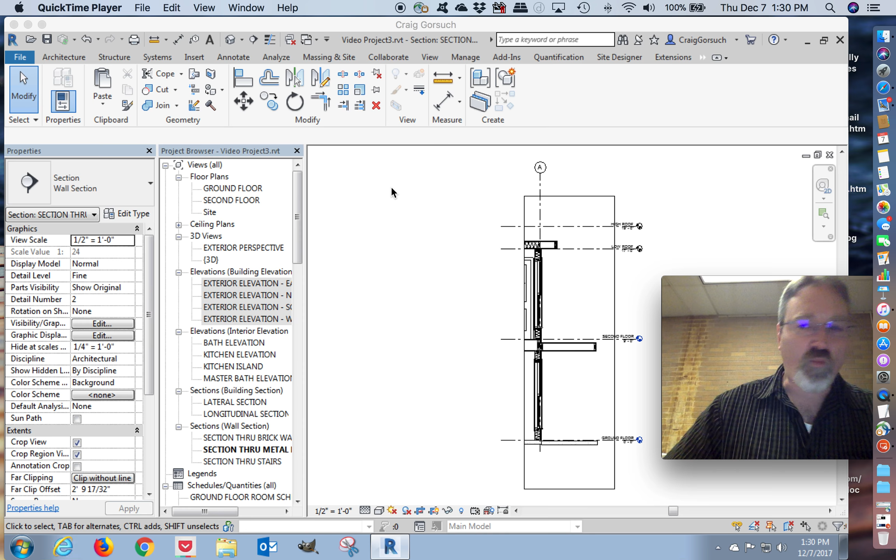Sorry guys, you're catching me mid-chew. I'm still sort of wrapping up lunch in between classes. Alrighty. Yeah, I know. Horrible manners abound. I know, I get that.

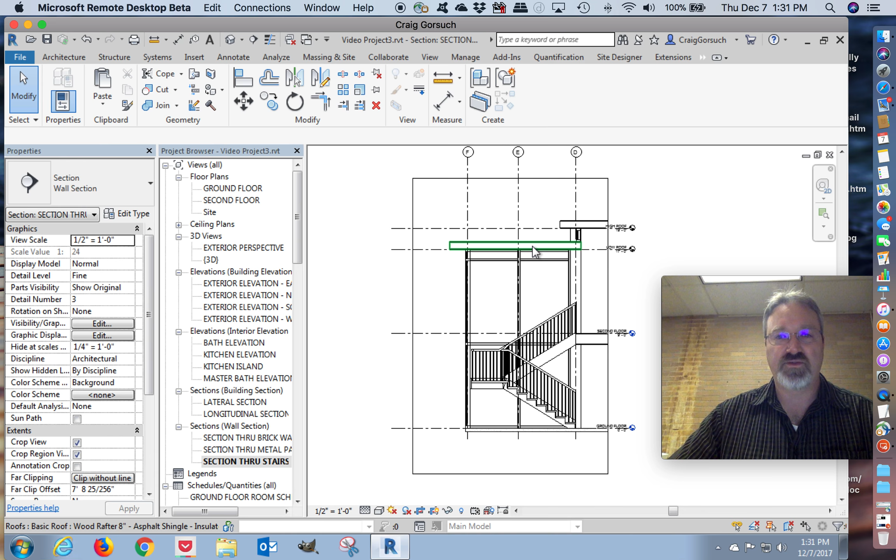Okay. We just finished dealing with some issues on our metal panel exterior wall. Let's go take a look at our stairs. Now, the things that we need to do to our stairs are not quite as extensive. For example, there's not a whole lot of information that we can add to the storefront. We are going to modify the placement of those mullions, and they have to be done kind of in a special way. But we need to add some information right through here, and we need to add a little piece right here. So let's zoom in.

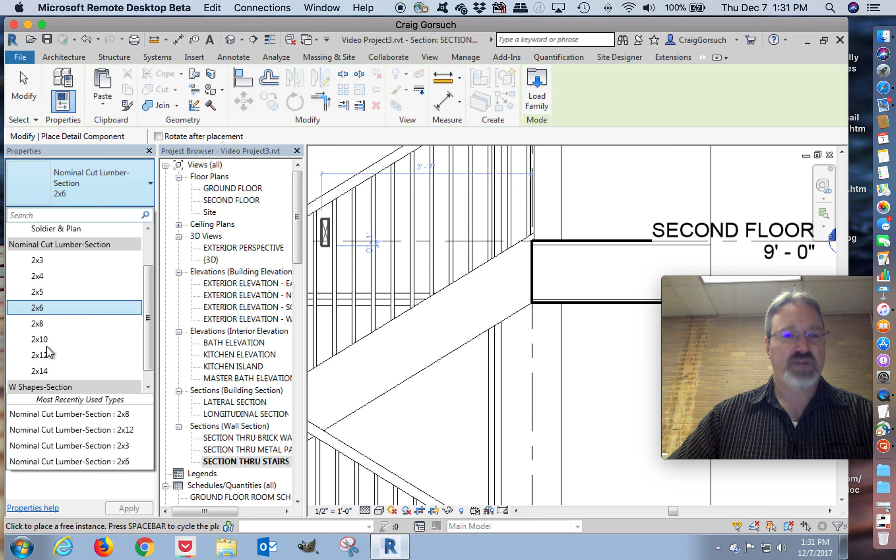Second floor, this is in front of the landing for the staircase. Back to, excuse me, annotate, component. Why, yes, thank you. I'd love to save the project in case something explodes. I don't want a 2x6, I want a 2x12 because that's the size of the member that happens right there. I'm going to go ahead and spin this. No, I don't want to spin that around 180 degrees because I want this to line up on the outside right there.

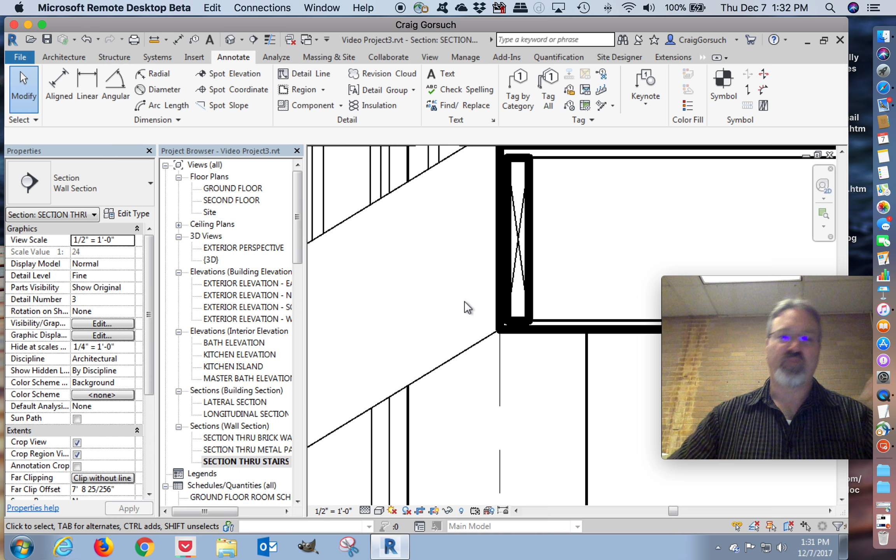And we're going to fake in having a chipboard wrap that runs up the side of that. I'm going to select that bit of framing, use my move command, and move that over a 1/2 inch because that's the same thickness as a typical bit of sheetrock. It's kind of hard to see. It is there. It's going to indicate that something's going on. And we're not discussing actually creating details in this class. That's something else. Okay. I'm going to zoom up here.

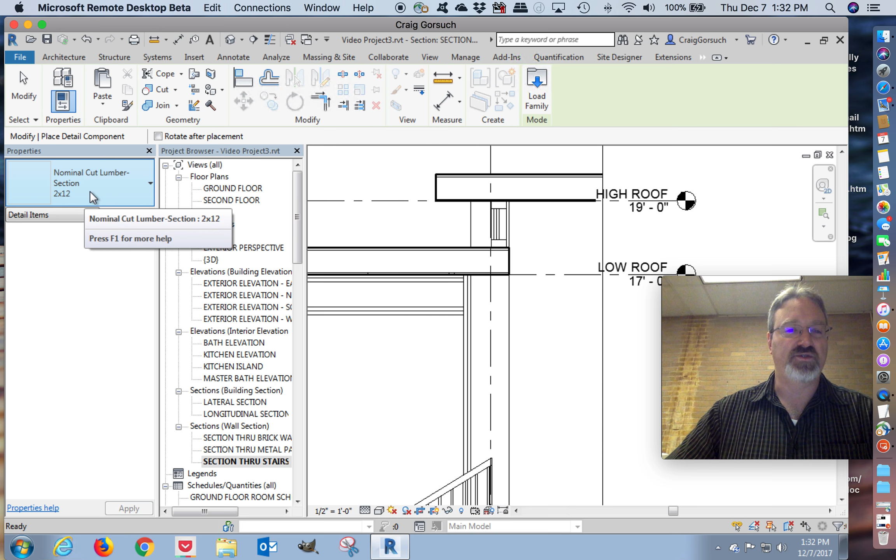We've got some issues on the high roof and issues on the low roof. We need to fill in the missing elements here. So again, I'm going to place a component, but instead of a 2x12, I'm going to use a 2x8. I'm going to zoom in. Where does he go? He's going to go, okay. I am going to spin him around and put one there. I want to put another one right next to it if it will let me. There we go. Boom, just like that.

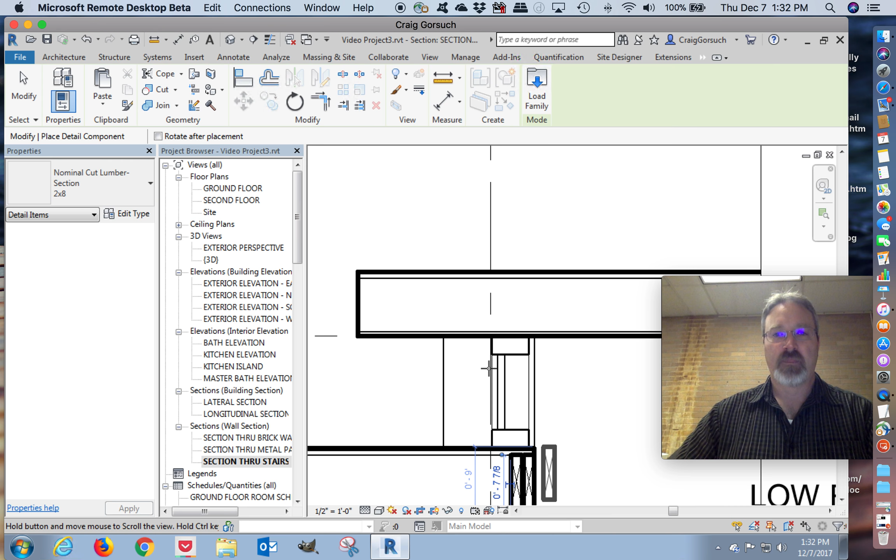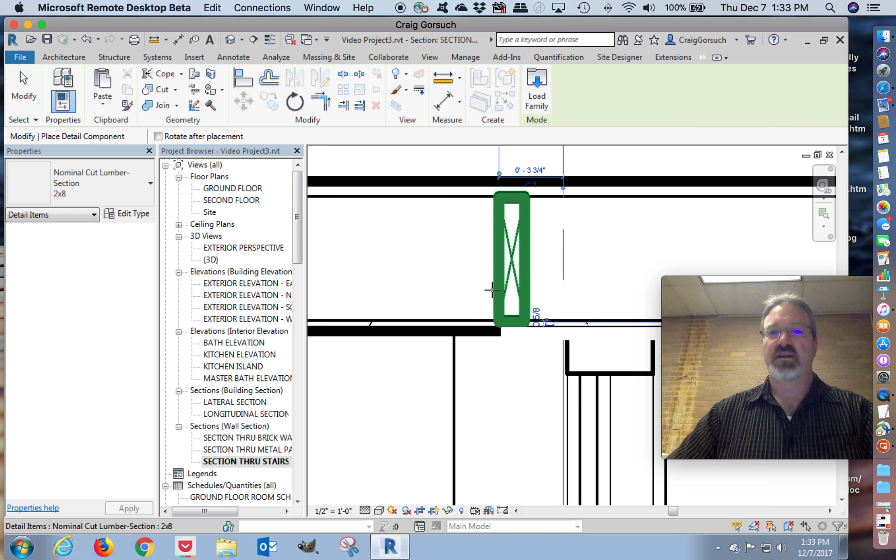Press the space bar twice so I can spin them around, so I can place one here. And I'm going to fine tune the placement of this one. Let me check my notes real quick. There we go. Sorry about that, guys. Again, I'll fine tune the placement. Let's rotate 90 degrees. Change our size to a 2x5. I'm sorry, a 2x6. Excuse me. 2x5s really don't get used very often. Rotate them.

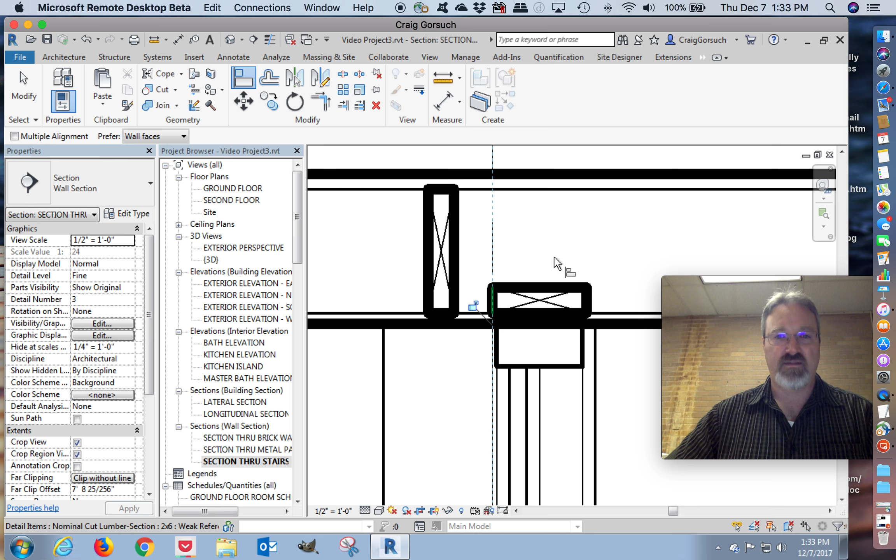There we go. I want the front end of that to align with the grid line here. Actually, it looks like it's there. I'll use my align tool to double check. Modify, align. I want to align to my grid line, and I want to make sure the back edge of that framing is in alignment with it. So that's what's happening there. That's exactly what I want it to look like. Press escape a couple times.

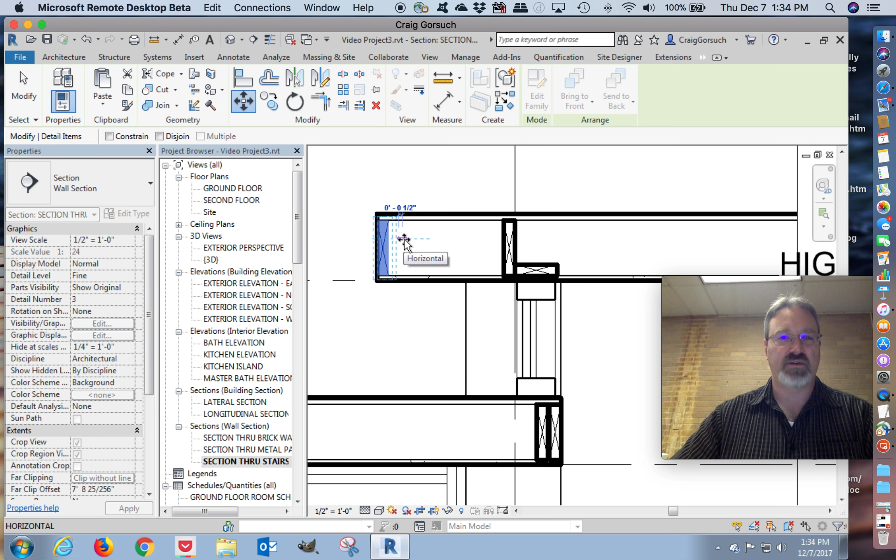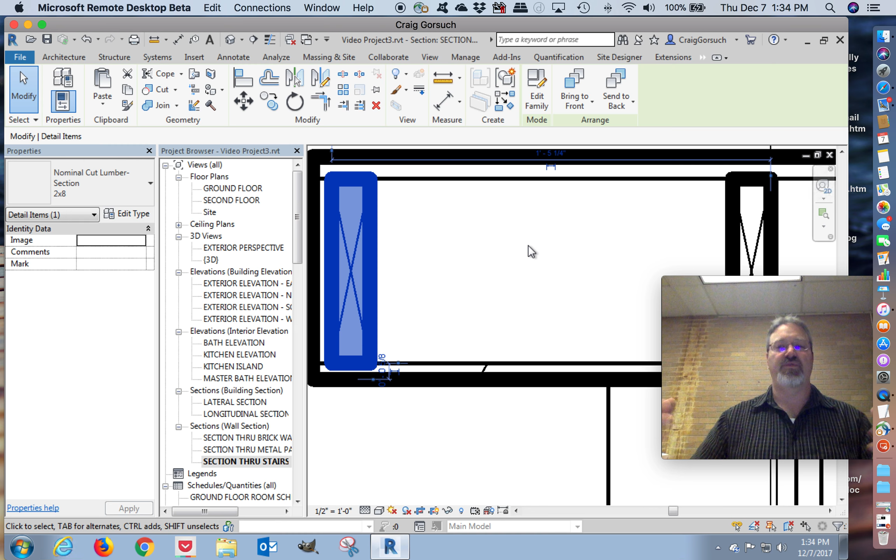Okay. Select this end piece of lumber. Use my move tool. Move that back 3/4 of an inch. And you can see I can use those temporary dimensions to fine tune what I'm doing. It's easier when you zoom in, when you can actually see what those dimensions say. Or of course, just like in AutoCAD, you just drag in the direction that you want to go and then type in 3/4 of an inch and it will go that direction. So the math is already built in.

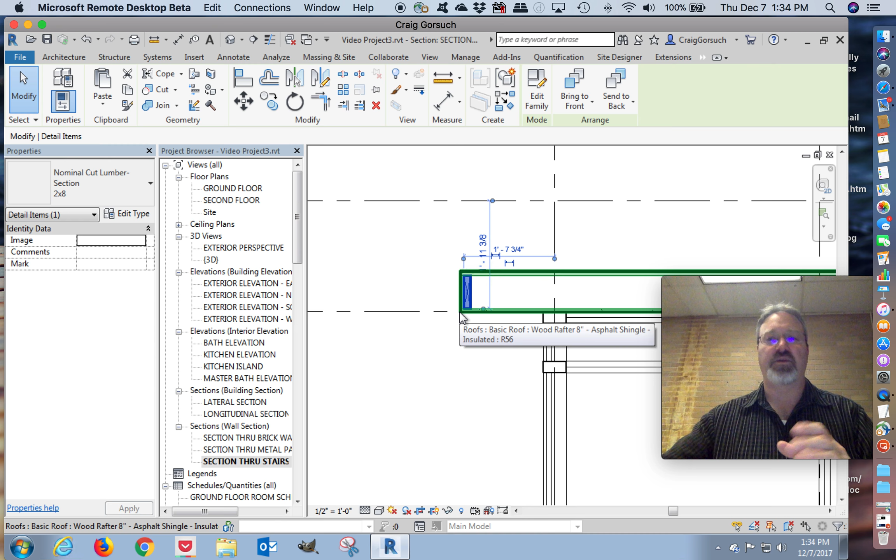Okay. I want to duplicate this down over at the other end, so I'm just going to use my copy command. I'm going to pick the top left corner of the roof, pan over to get the top corner here. That way I don't have to place it and then move it back. It's just right there and it's in the right place. I want to take this condition that I have here. I'm going to select them both. Select one, hold the control key, select my other one. I'm going to zoom in a little so I can actually see what I'm doing.

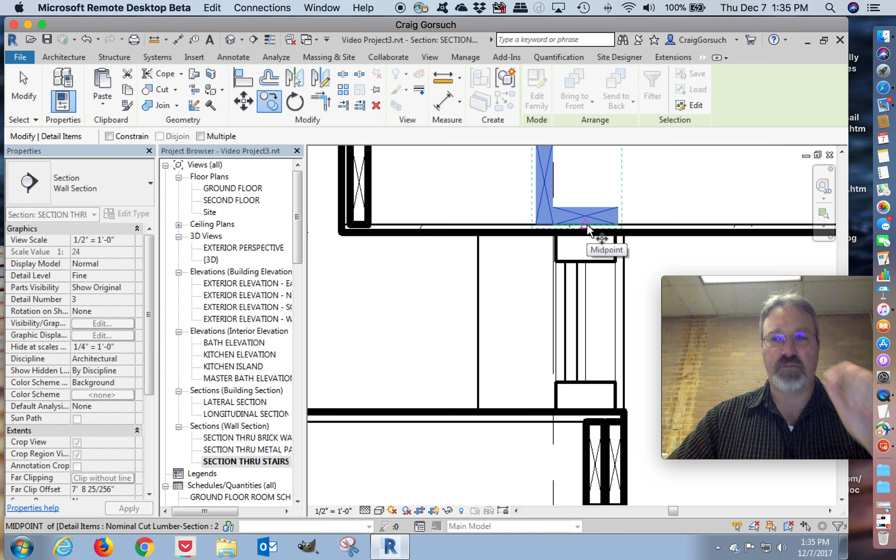I'm going to use my copy command. And I want the midpoint, there we go, the midpoint of the bottom edge of that bit of framing right there. That's where I want to copy from. So left click, zoom out, pan over, zoom in, and I want him right there. That'll do. That will work nicely, and that's pretty close to what I've got there.

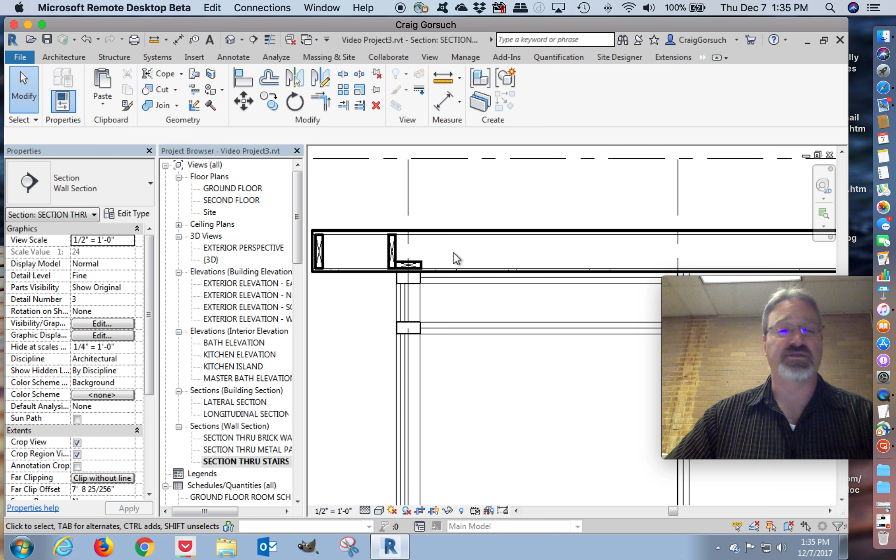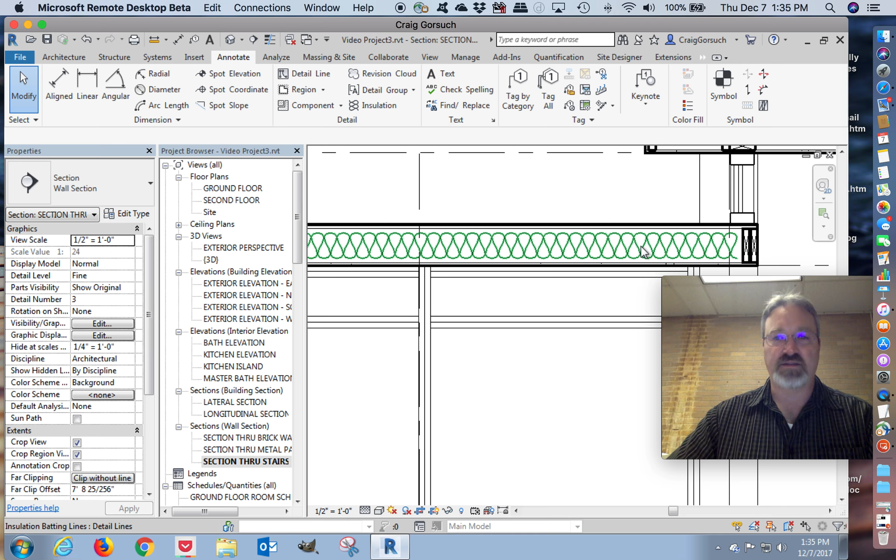Okay. Now we need to add some insulation. Annotate tab, insulation. It's already 5.5 inch, so I'm going to start at the midpoint here. Whoops, that's not supposed to be 5.5 inches. That's 7.25. But you know what? We can change this after the fact. Go from midpoint to midpoint. I'm going to click escape a couple of times on the keyboard, select my insulation, and I'm going to change this value from 5.5 inches to 7.25 inches. There we go.

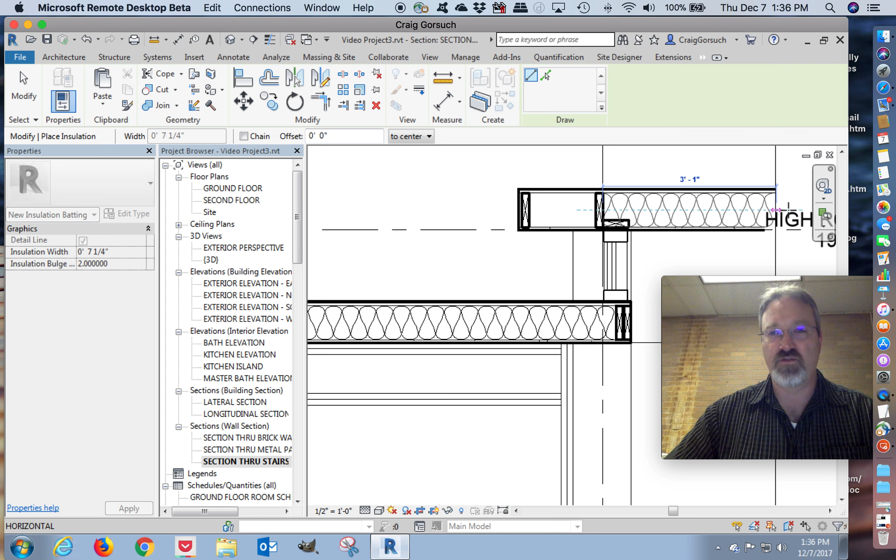Place insulation. Now it remembered the previous value when we actually used the command. That's 5.5 inches, so now I need to change it to 7.25. And I'm going to start on this second piece and just move my mouse until it disappears beyond the border of the view. Now, in terms of adding detail elements to sort of help flesh out what's happening here, this is done. Everything for adding detail elements is done.

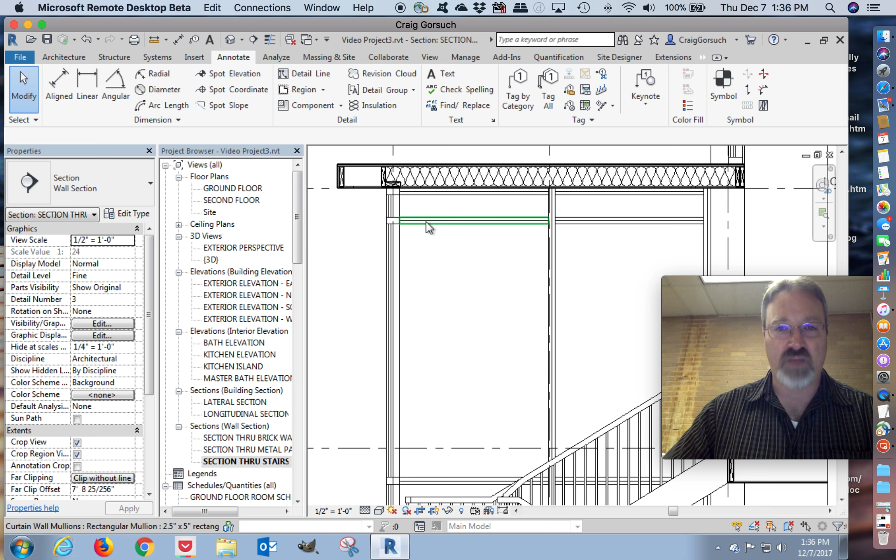What I need to do now is I need to modify the position of my mullions. And I don't know why that's showing up that way. It looks awfully funny. It appears to be a little display glitch. I don't know why it's doing that.

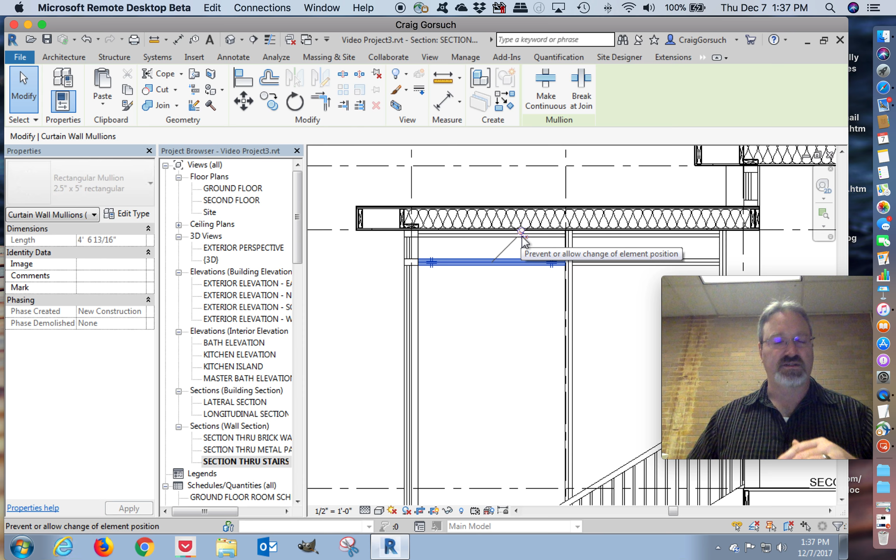Okay. So what happens if I select a mullion and I click on move and I want to just move it? What happens? Nothing. And the reason that nothing happens is, first of all, a mullion is pinned. Strangely enough, we're not moving the mullions. The mullions in the storefront are actually dependent on another piece that lives inside the wall. And we can't move the mullion until we move that piece inside the wall.

So I'm going to zoom in. I'm going to hover over the edge of my mullion. I'm going to click tab once, and that will select the entirety of this storefront. I'm going to click tab one more time. That is going to get the chain of both pieces of storefront. So it's the piece that runs this way, and then it's the other piece on your left-hand side that's running this way. So now both of these are tentatively selected.

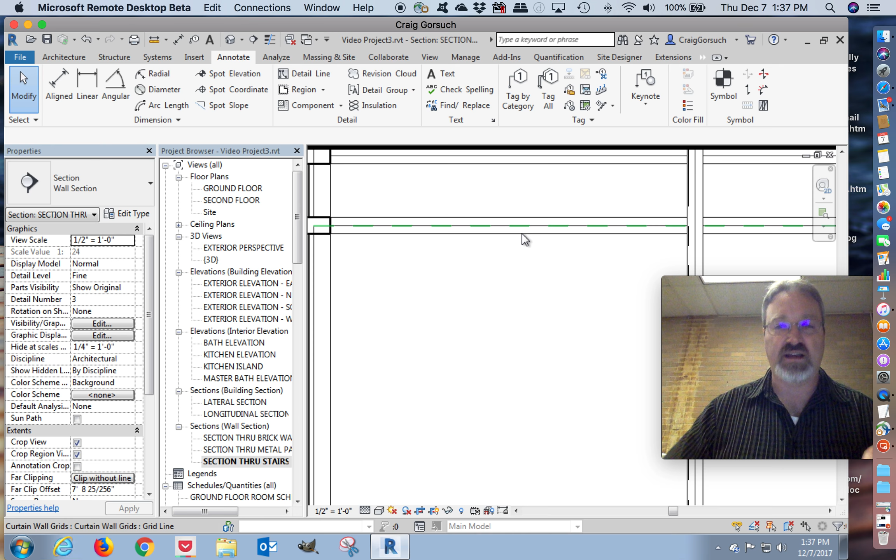I'm going to push tab a third time. Now you see that green dashed line that shows up. It's going to be a different color on your machine, and that's fine. Now I click. This is the curtain wall grid. This is the object that lives inside the curtain wall that dictates where the mullions happen. We need to unpin this.

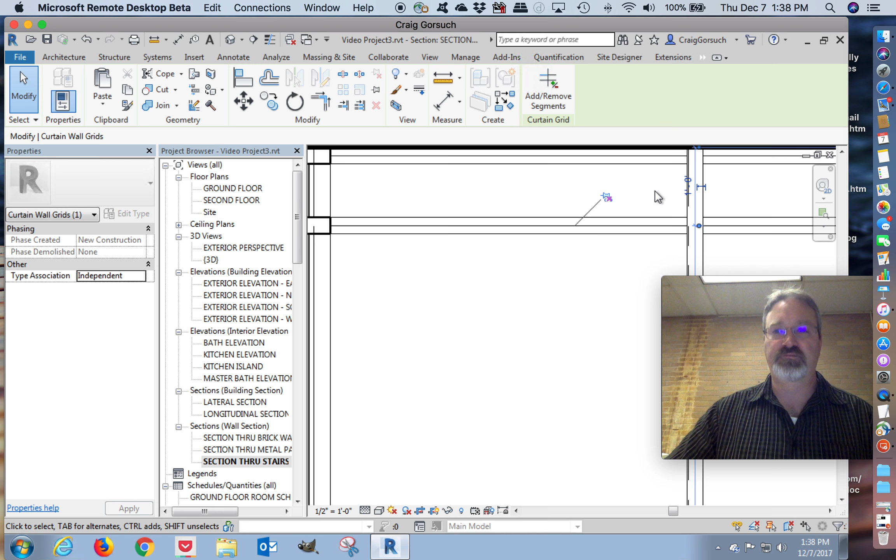What this is going to do is free it from the rules that are governing its current position. So I unpin it, and I'm going to use this temporary dimension right over here. It's kind of hard to see, but there it is. I'm going to click that dimension. I'm going to change the value from 1 foot to 5'8". Why? Because I know that's the dimension that it needs to be.

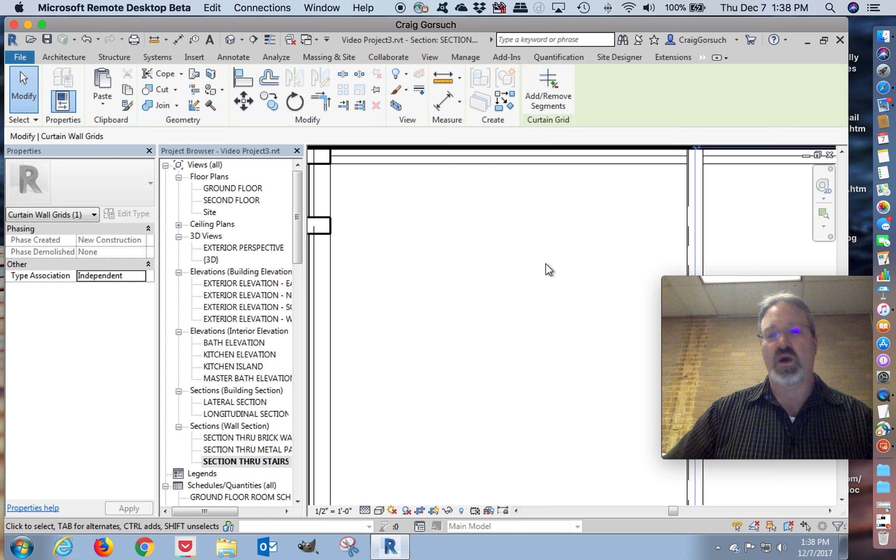So there we go. You can see it moved that mullion down, but it only did it on this one wall. We need to repeat the process over here. But as you notice, if I zoom in, I can highlight the mullion, but all I have to do is mouse over the center line of the mullion, and now that curtain wall grid highlights. It's just something that Revit does. It's easier to select this in section than it is in elevation.

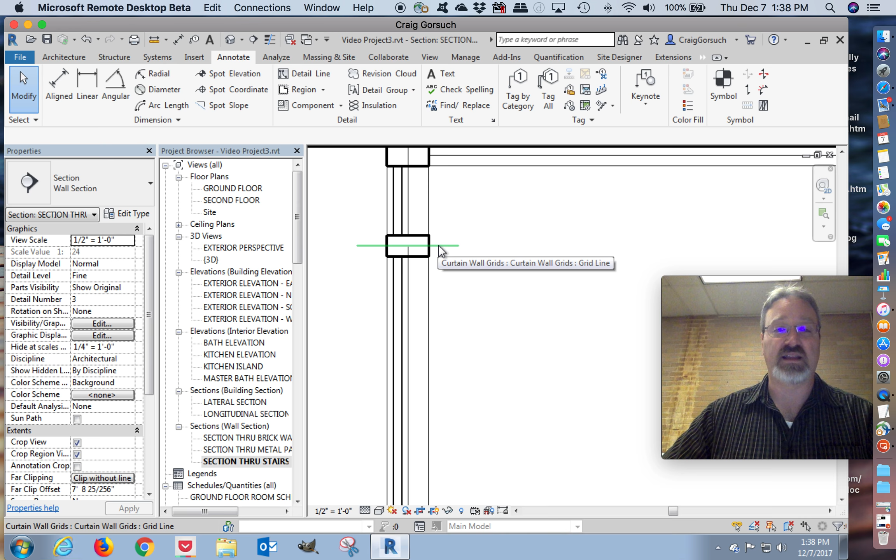So I'll select my curtain wall grid, unpin it. There's my temporary dimension right there. Click right there, enter 5'8", and my dimensions are driving the location of my mullion. I want to duplicate this down on the bottom end because I want the top mullion to be the same distance from the top of the storefront as it is at the bottom. So I want them both to be equally shrunk in on both sides.

So I mouse over until I find my curtain wall grid, unpin it. Here's this dimension down here at the bottom. Select it, 5'8". That's moved that mullion down. I hover my mouse over this mullion, tab once, tab twice, tab thrice. I don't get to use that word very often. I love it. Left click.

It's really hard to see and make out, but there is our pin. I want to unpin that grid mullion. Come down here. It's kind of hard to see again, but there's that temporary dimension. Highlight the dimension, 5'8", push return. Now you can see those grid lines line up.

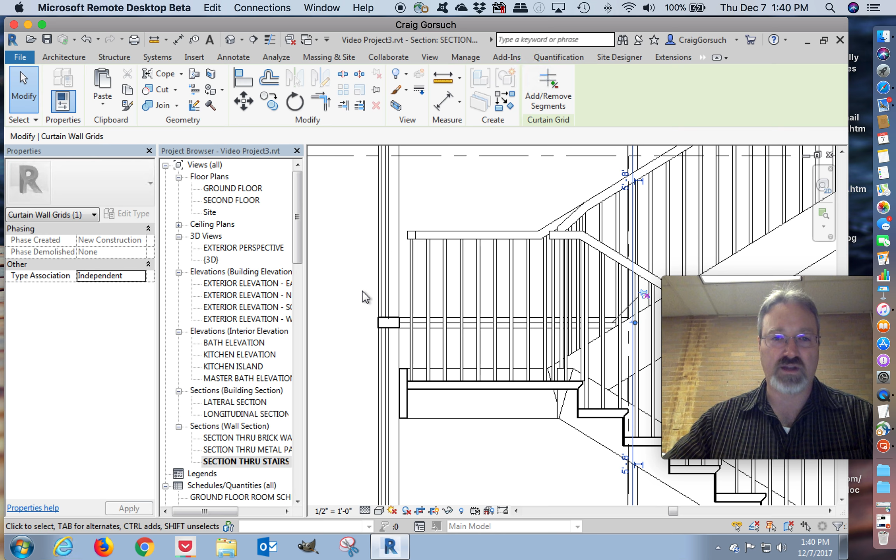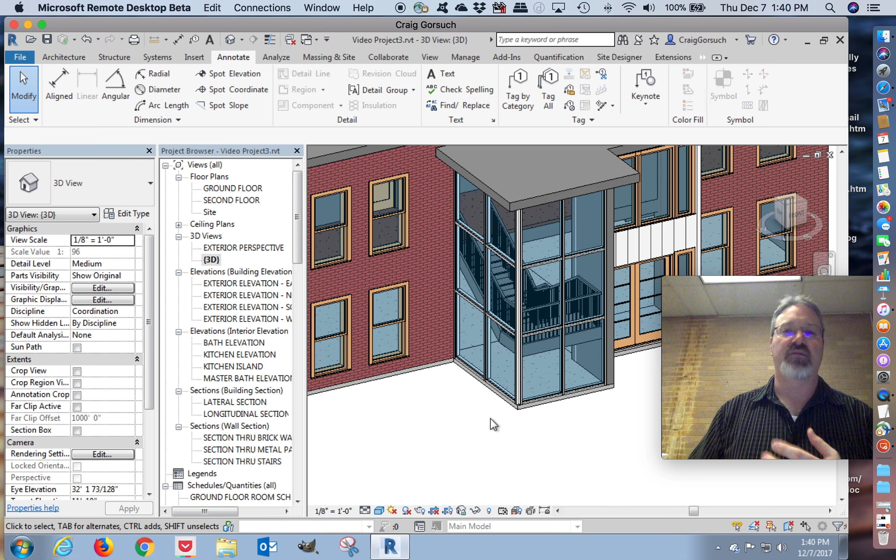And because we're doing all this in three-dimensional space, when I look at my overall 3D view and I spin around, there it is right there. You guys can see it. The modifications that we make in elevation are reflected everywhere. So this is one of the things that we absolutely love about Revit: you change it one place, it updates all over the place. It's wonderful. Love it, love it, love it.

Okay. Back to our section through the stairs. The only things that I really want to add here is a couple of dimensions that illustrate where our storefront dimensions are hitting. So click Aligned Dimension. I'm going to start at the ground floor reference plane. I'm going to zoom in. I'm going to click the top of the mullion. And then I want the bottom of the next mullion and the top of that mullion.

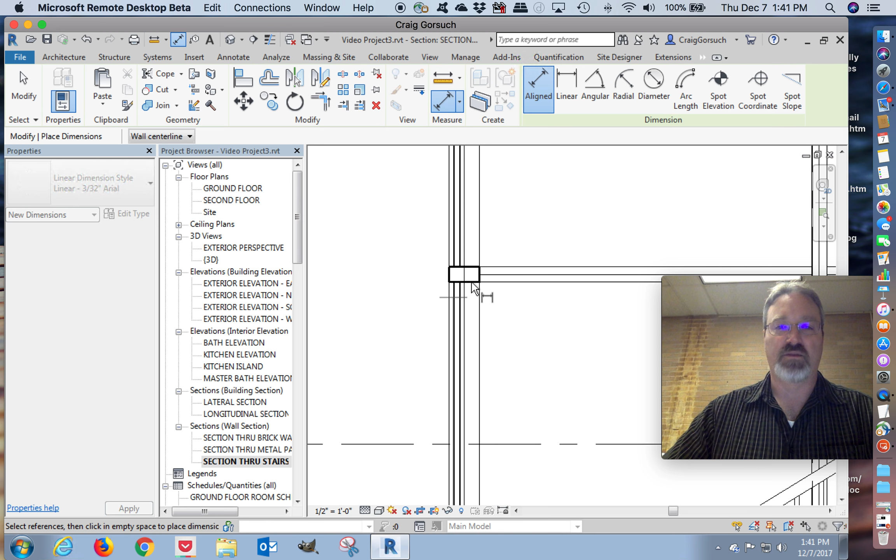I'm going to bypass the second floor level. I'm going to go mullion to mullion. And then mullion, and then click on the level here, and that's my final spot. Pull back out a bit. Boom. That's doing exactly what I wanted to do. All right. So those are the modifications to the stair section.